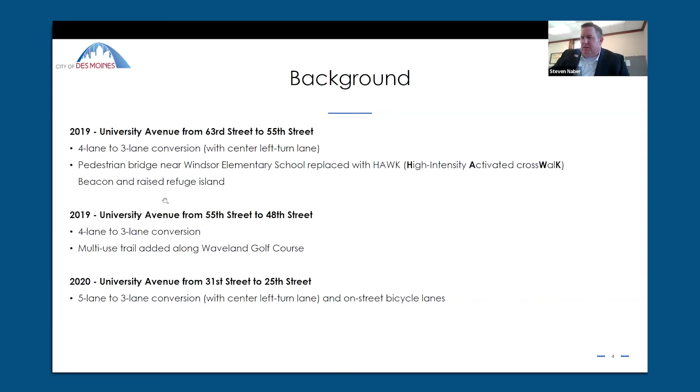Last year, as you may be familiar with, we resurfaced the roadway pavement between 25th and 39th, converting it into 3 lanes with buffered bike lanes. Essentially, this project is kind of extending that project. There was also some storm sewer work done as part of the sewer separation efforts, and then we had to do an emergency repair of a collapsed sanitary sewer.

Obviously, when we get into these projects, we find more infrastructure that needs work. So just to clarify, with the 25th to 39th project, there is still some work to be completed this year, including adding a mid-block crossing with a refuge island on University near 35th.

We still need to replace the traffic signals at University and 31st. And then there's a parallel parking lane section that needs to be constructed between 35th and 37th. So there is still some work to be done in that first phase of this section.

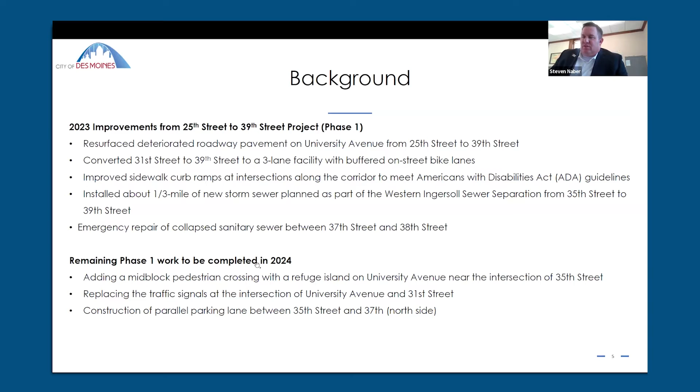When we look at these projects, in this case we had a resurfacing project and some sewer work to do. We always take a look at what our transportation master plan, Move DSM, says. So here are the highlights: it's part of our core bike network, and has been planned as part of that network for some time. It's a truck route, transit route, and primary emergency response route. The existing speed limit is 30 miles an hour, with about 12,500 vehicles a day.

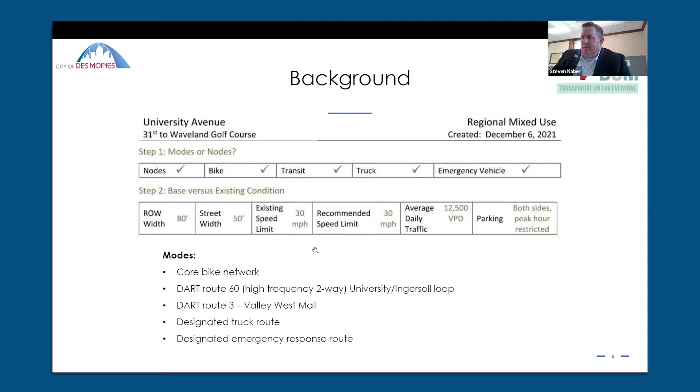So what's the point of the project? Well, the main goal is safety for everyone along the corridor. This goes right through the heart of our major neighborhoods and residential areas, so there's lots of pedestrian traffic. Going to road diets like this, reducing to 3 lanes, has been proven nationally to improve roadway safety. It's obviously easier for pedestrians to cross one lane of traffic in each direction than a 4-lane undivided roadway with 2 lanes in each direction.

And it's better from a vehicular standpoint too—there are fewer turning conflicts. The hope is that more reasonable drivers will help control the speeding traffic and reduce some of those speeds.

We did take speed information in the area of 45th and 46th Street, recording speeds over a 24-hour period. The 85th percentile speeds were between 37 and 39 miles an hour. That's what the majority of people are going—85% or below are traveling at that speed or below. So a lot of people are traveling at that speed, even though the speed limit is 30 miles an hour. We've got to look at ways to try and curb that down.

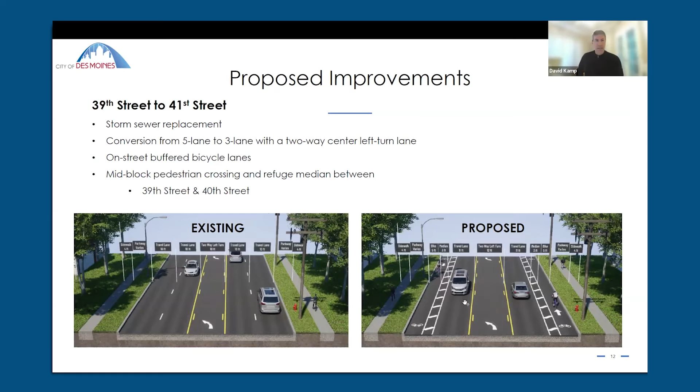And then there'll be a mid-block pedestrian refuge for pedestrian crossing at 39th and 40th.

So the next slide shows a little bit more detail of that storm sewer outlet. We're focusing on increasing the size of the storm sewer pipes here at the outlet.

We're also consolidating some of the pipes that were coming in along 39th Street to make it a little bit more efficient. And this includes

the storm sewer work in University, but this will not be to the extent that you saw in the previous phases. So it will still have some impacts, but not as significant as the previous phase.

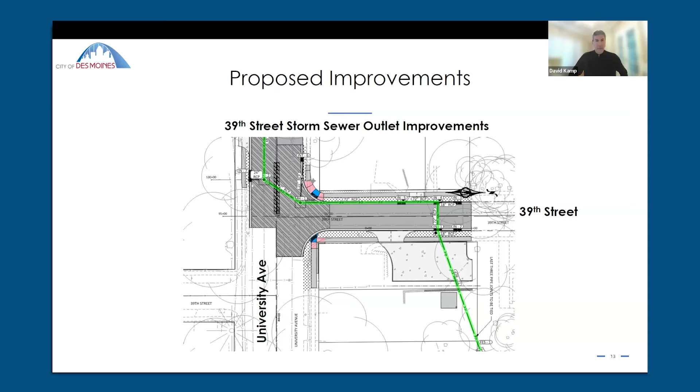As we talked about before, the 42nd Street signal replacements.

42nd to 47th Street is mainly just a mill and overlay, converting the 5-lane to a 3-lane with a 2-way left center turn lane,

providing those on-street buffered bike lanes with a mid-block pedestrian crossing refuge at 45th and 46th.

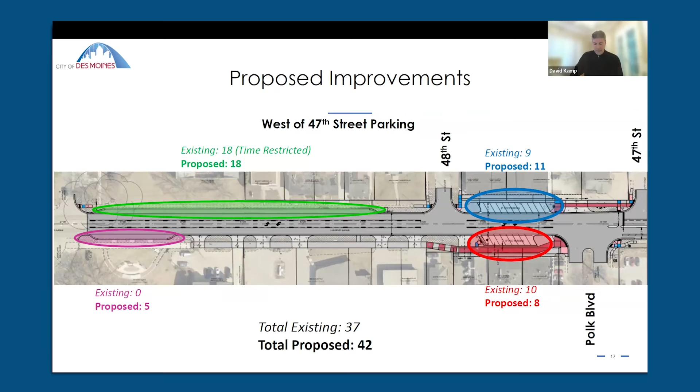So that gives you, for the area we were looking at, about 37 parking spots. We've added about 5 to get to about 42, but in front of the businesses, the total number did stay the same. Jump to the next slide.

I'm going to turn it over to Jacob Ahrens to talk through the construction schedule and some of the finer details of the staging with that. Can everybody hear me here? Yes, sir. My video is not working for some reason - I don't know the setting causing that, so I do apologize there.

Looking at the construction schedule and phasing, as Dave and Steve both mentioned, we are starting with 42nd Street, which was not in the original plan. The basis behind this is that it's going to be one of the first and primary detour routes given its current condition. There are some hold-up spot repairs we completed, coordinating with residents. The road closure will be roughly a 2 to 3 week window, currently estimated with the schedule from the contractor to be April to May. With that detour, it'll utilize Interstate 235 and 31st Street, with that being a designated truck route.

As we jump to the next phase, 2A and 2B, shown in the top right corner - that's 2A, where the biggest component of construction will start. This will be underway potentially at the same time as phase 1, since we're not causing impacts into the University corridor, just a closure of 39th to get the storm sewer started, shortening the construction period by doing 2 components at once. So they'll work 39th out to University. Once they jump into 2B, that's when the closure of University would occur due to the depths of the storm sewer, keeping in mind we want to make sure it's a safe area for pedestrians, vehicles, and so on. So 2A is March to early July, and 2B would be June to early August as the anticipated schedule from the contractor. That detour will utilize 42nd Street to I-235 and then back on 31st Street.

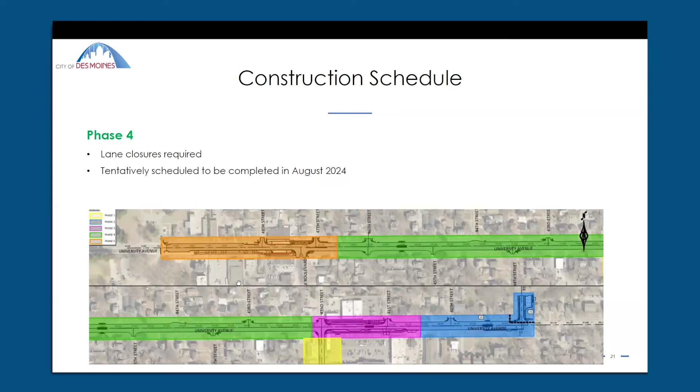Working on the north side, we'll then shift to the south side. Once both sides are completed, we'll put in the median at 47th Street, wrapping up that intersection for those turning movements.

As driveways and sidewalks are removed, the same process will take place to maintain access in and out of businesses. We'll work with the businesses to see what days are best for removing pavement in front of their buildings, and look at some sort of temporary measure if needed. Then as construction activities occur, it's just a matter of coordination.

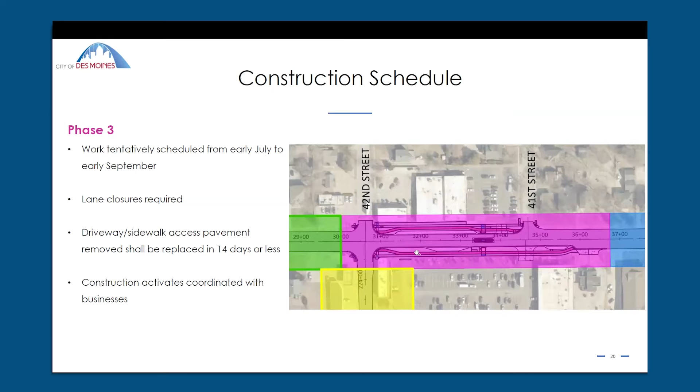Thank you. You know the question I'm going to ask. Are you going to accommodate a bike wanting to turn left from Polk onto University? Will there be a loop or some sort of detection so that we don't have to break the law to turn left? Appreciate that, Carol.

And yep, so the answer is yes. I'll give it a shot, and maybe Jen Dokovich or John Davis can make sure I'm speaking right. But my understanding is when the signals are placed, they'll be put in different types of loops. Quadrupole, I think I'm pronouncing it right, are the types of loops that will be put in to better detect bicyclists, because our understanding is that's the issue - you can't get a signal until a car comes. And so they are correcting the loops. John or Jen, did I get that right?

You did get that right. Yes, there will be detection for northbound vehicles turning both right and left from Polk Boulevard onto University, and for vehicles, including bicycles, turning westbound left onto Polk Boulevard. East and west through traffic on University returns to green on its own, so it doesn't have detection at all. You will always get the green if there's not a vehicle waiting on Polk Boulevard. So yes, and those loops are quadrupole loops, and they're designed to pick up bicycles, motorcycles, cars, trucks.

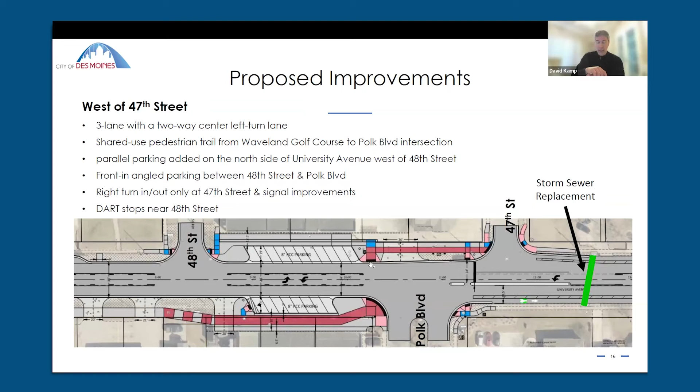Okay, and then will Kingman be closed again this summer like it is now? Kingman is closed right now for a sanitary sewer repair. We are working on a resurfacing plan for Kingman, and if it is closed this summer, it would be short-lived.

Okay, so like - short-lived, Dave, is like what? Would that be two days, roughly? You know, you'd mill it, you'd go in sections. You'd mill one day, you'd pave the next day. It's just the resurfacing of Kingman.

It's closed right now, and it's unfortunate because it's a parallel street to University, and it's a place to ride, a low stress place to ride, especially while University is under construction. So the timing of having them closed at the same time is really unfortunate.

So if there's a way to really make the Kingman work short, we should be done. The hope was to be done, I think it was June, because what's going on there is it's a sanitary sewer repair, but we have to relocate two water lines, one being 8-inch and one being 20-inch. That's why everybody got the notice about water being out as well. So it's not a simple fix, but that's a big deal to get that one done.

Waterworks didn't want us closing that 20-inch water main down in the summer, so we had to do it in the winter. So Dave, we're hurrying it. And you are correct, we're not going to be closing University right away. We're going to be working on 39th Street sewer north of University first. So the plan, Dave, is that the Kingman work would be done in June before the real heart of the University work starts in July. Is that the plan? That's the plan if everything goes according to plan.

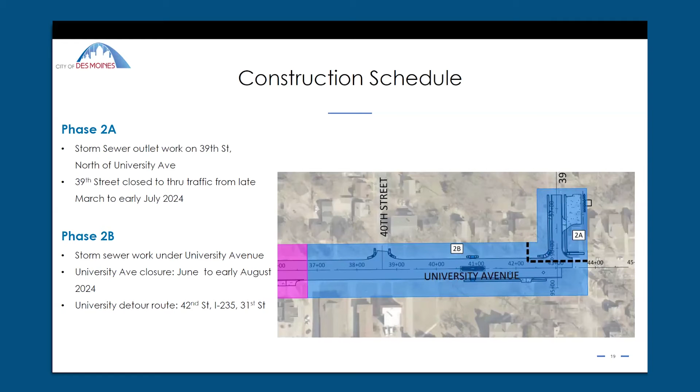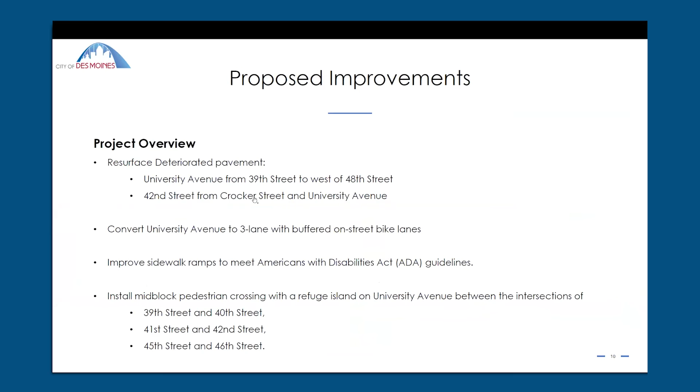I'm just going to talk a little bit about the phase that's finishing up now. It is really in a bad state. I last rode through it on Sunday, heading from the Varsity Theater towards Polk. It was nothing but barricades with no signage, and I almost got run over two times in that short distance by big old pickup trucks. One of them waved at me, not with a friendly wave, and screamed 'get on the sidewalk.' So please provide some signage about bikes can use full lane or something, because there's nowhere for us to ride. It's very unsafe, and there are so many barricades, it's very cluttered. Hopefully that piece will get done quickly.

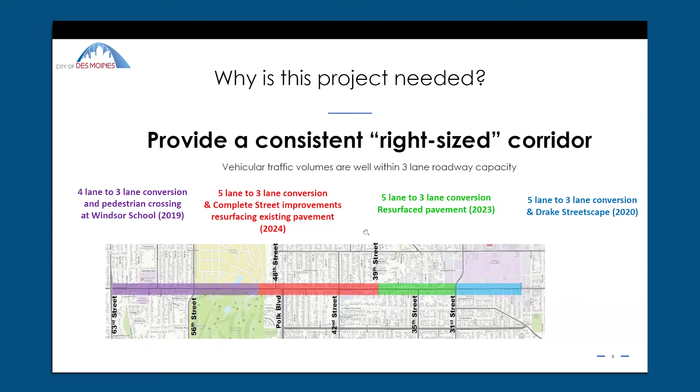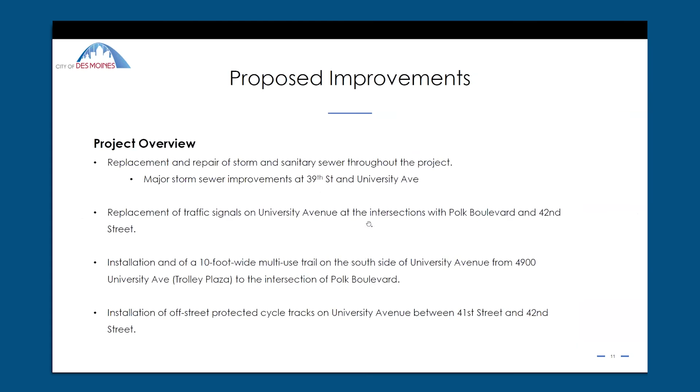This looks great, I'm all for the bike lanes and things. My question that I've sent to you guys is that we have 7 or 8 individual business buildings between 42nd and 44th Street. Right now we currently have on-street parking available. We all in this neighborhood know that it is not currently safe to actually use most of the time, so it doesn't get used often. My question is, why are we losing the on-street parking for a commercially mixed use, commercially zoned block here?

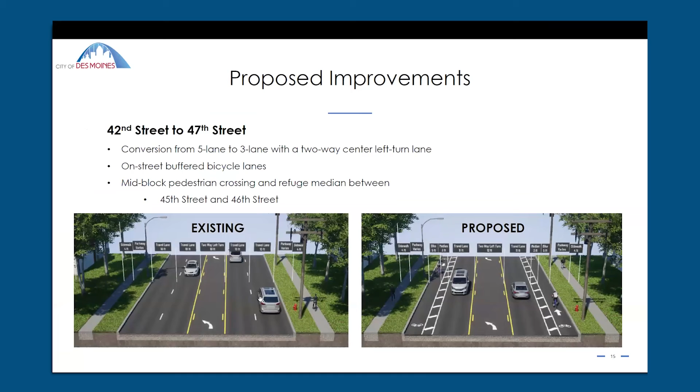And Laura, just to clarify, you're meaning 41st to 42nd, right? Well, between 42nd and 44th or 45th, we're all commercial businesses here, minus 3 homes in this block. And I recognize that parking does not get used often because frankly, people are just flying around each other, turning left off of 42nd, going around Little Caesars there. So nobody feels super safe parking there. But it is available, and I'm a little bit concerned that all of these commercial businesses are losing the possibility of on-street parking, when I think this could be a great opportunity to make that more functional for these businesses in this block. And you're saying all the way to 44th, or maybe just the first block to 43rd? That first block, there's 7 or 8 of us commercial buildings in this first block right here.

Okay, I appreciate that comment. I think, is it now, because currently you can only park there some times of the day, but not during the peak hours? Is that correct? Yeah, not 4 to 6 on our north side and not whatever the morning shift is on the south side. And it's not only the commercial, as that goes further there's several multifamily units and things like that as well, and I think they use that further down the block a little bit more on the street.

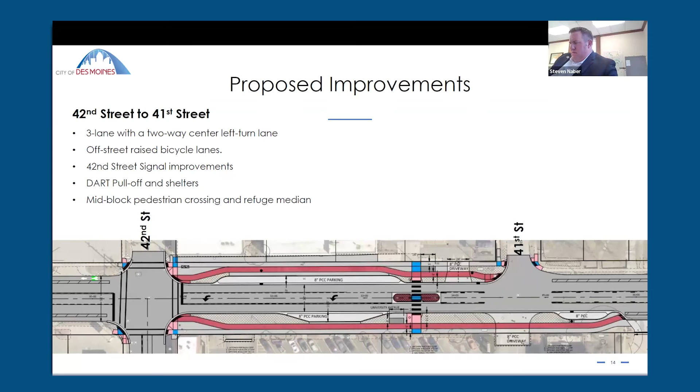Sorry, Terry, I was able to hear you, but I could not hear Kate. Can you hear her now? Sorry, I hear you, but... It's paused for some reason. Hello, can you hear us? I can hear you, Terry. Okay, Kate, go ahead. Terry, I apologize, we can hear you very clear, but we can't hear Kate at all. I don't know, maybe we could, Dave, maybe we could put up Chris's information and connect Kate with Chris directly. Let me see, what's up here?

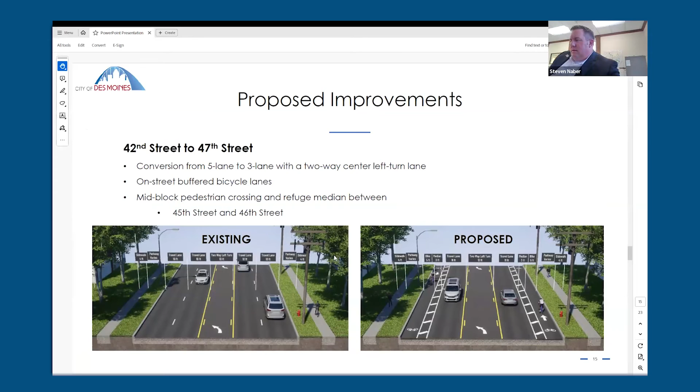All right, let's switch. Is the web page showing up? So again, if you go to the city website, under departments, engineering, then projects and studies, you'll see a whole bunch of different projects. Type in University, click on the more info, and here's the background. This page has been up a couple of years, and it has our project manager, Chris Kuhl, and his information: 515-283-4073, with his email ckuhl@dmgov.org.

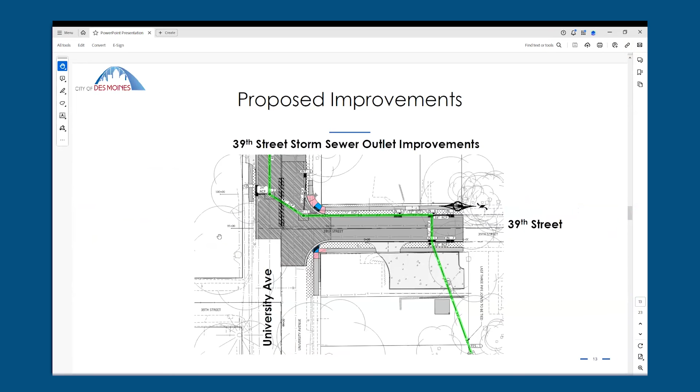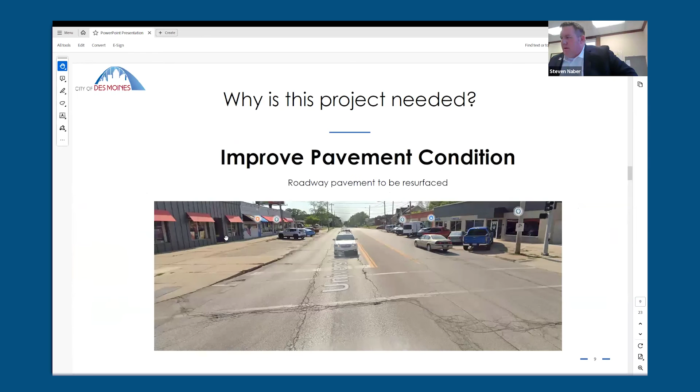If you go back to the one node there, starting on the west end where we showed the parking, you can see them a little clearer. For the most part, everything outside of the nodes, off the top of my head, stays within general vicinity of where they are today. On this sheet here, you can see just west of 48th on the north side, just outside that green oval, there's one right there.

So there is a bus pad projected in the future that DART is looking to coordinate. For the time being with this project, we have provided that access point to the curb for pickup. And then on the south side, just across the street, we've moved it slightly further west so that when buses do stop, they're not conflicting with turning movements for people coming in and out of 48th Street and the traffic around the node between 48th and Polk.

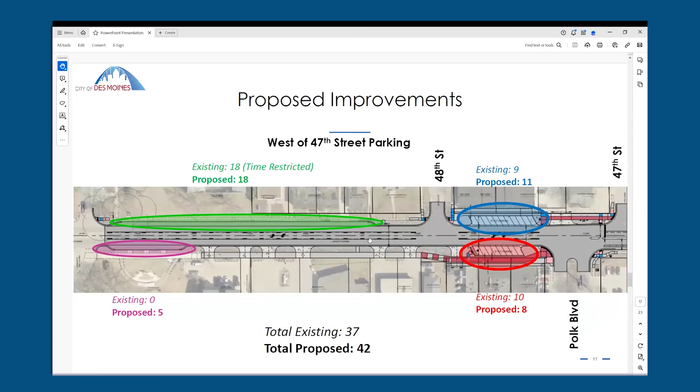And then the other specific ones would be down between 42nd and 41st. Those will be designated areas built as shelter pads, and then DART will install the shelters after the project. So in the darker gray there on both sides, the south and the north, the pads will be installed for the future DART shelter.

And then, like you said, the other ones are pretty much where they are today, and I think we've tried to get ped crossings nearby. Some of those are, right? So.

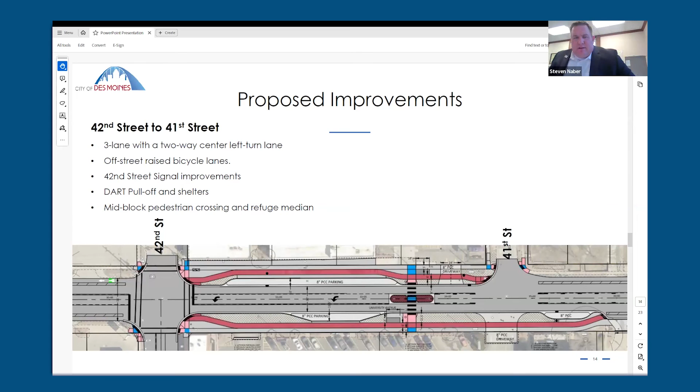Okay, and then let's see here. Chris Williams asked what traffic control will be in place on 42nd while it's being reconstructed during the school year. So let's go to that staging there. And again, one clarification, Chris—this is going to be resurfacing, so it's not reconstruction where we're digging all the way down to the dirt. So the contractor would be milling off pavement and paving new back. But that is a good question.

What is this? I don't know, Jacob or Dave, do you have any comments on what this will look like? It is during the school year, April, May, with the school just to the south there.

Yeah, let's see here. I'm just looking through the provisions here.

One thing we'll probably talk with the schools about, and we'll have to coordinate with them. I can't answer that off the top of my head. We may have to coordinate with the contractor to do some operations where they can flag and do lane closures during the week, but do we need to consider talking to the contractor about weekend surface paving to try and accommodate that? Or maybe that's something we can just discuss with the school, since they have a lot of days off too. So that's a good point, Chris. We're gonna have to work with the contractor and talk to the school district about when we think major activities such as paving would be best to do.

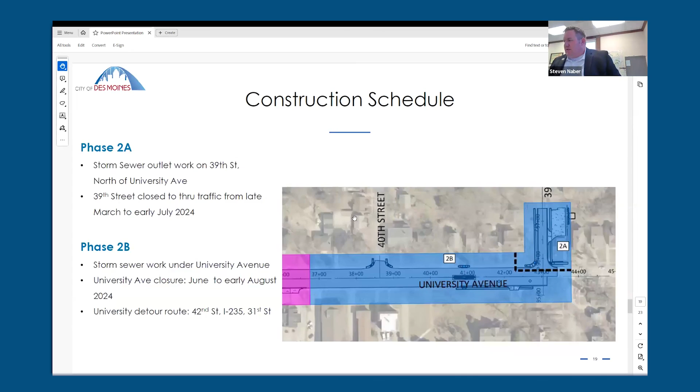Kate asks: my question is regarding our business receiving deliveries for our trucks. Will they be able to reach Heartland Animal Hospital through 41st? Good question. During construction, their trucks obviously have to get into this parking lot. I don't know, is that just a coordination effort for when there'll be a short time frame where there's actually paving at 41st and it's closed? Remember, they have two accesses into that parking lot right now. But there would be a time for the new access when we're rebuilding the driveway access, so we wouldn't do them at the same time - that's the idea, staging between those. And the intersection of 41st isn't a full reconstruct, so access would still be provided outside of that window when milling or paving takes place.

Okay, thank you. Let's keep going through it here.

Kate asks: does the crosswalk on University between 41st and 42nd have lights present to help crossing? Is this one of the ones where we're putting the conduits in, but there's not a signal? That's correct, there would not be a signal. With this scenario, you'd actually only have to cross one lane at a time. But there would not be a signal or flashing lights there - there would be warning signage, but not a signal or flashing lights.

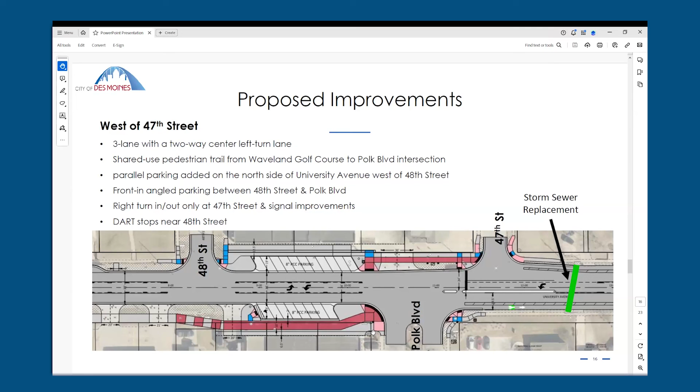On the diagram at Polk Boulevard, where they can cross from the north side to the south, how is that controlled? Is it bikes cross at their own risk, or is there a light where traffic would have to stop? Everyone, bikes and pedestrians, would use this as a crossing, so it'd be the traffic signal - you'd have to press the push button, and it'd be like a walk, don't walk signage like other corners and crosses. Okay, thank you.

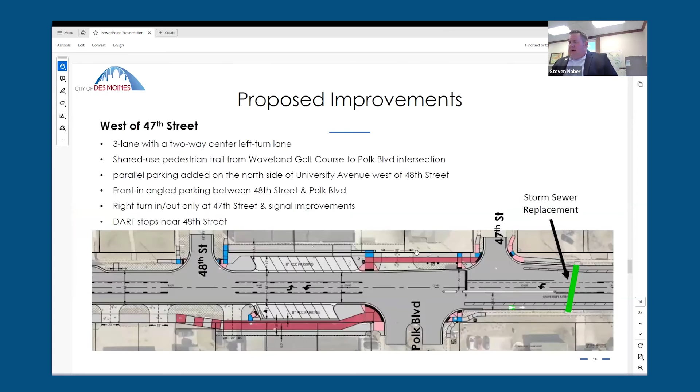Monica has a comment: I'm one of the homeowners at University and 42nd next to Kum & Go. How long will our driveway be blocked, and where will we be detoured? Where will we park our vehicles? Good question - let me see if I can get to a good staging section there. It's probably in the green section.

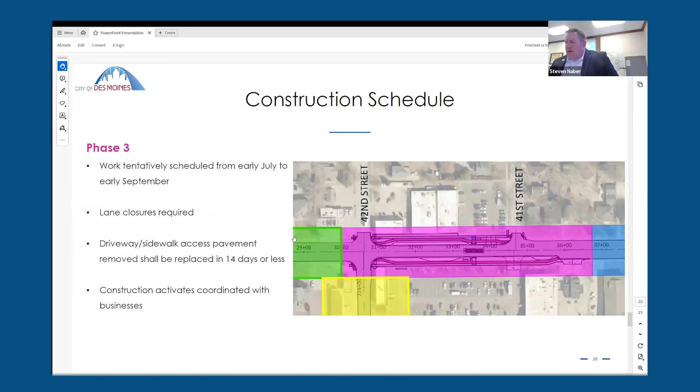Can you talk about the construction in the green section where there's homes, and how long people might be out of their driveways? That'll get talked through with the contractor. I'd see it very similar to the phases we just saw east of 39th, where they mill outside of peak hours and put back pavement as quickly as possible, then come back through with the overlay operation, also outside peak hours as best as possible. That allows residents to exit their driveways in the morning, and hopefully everything is put back to provide access when they return in the evening.

Similar looking down 42nd Street as well. That would be coordinated, setting out a flyer to everybody on when impacts are anticipated. If we break it down into sections with the contractor, that'll be notified out to everybody at that time.

That's a good one, you mentioned the flyers. There'll be letters during certain phases to people if there's closures or major items of work happening.

For this project and its impacts, we're going to have an on-site construction inspector, a project liaison. Jacob, do we know who that person is? Yep, the primary contact for Bolton and Menk out there doing day-to-day operations will be Rob Silliman. I can pass that contact along, let me get it pulled up and I'll put it in the chat as well.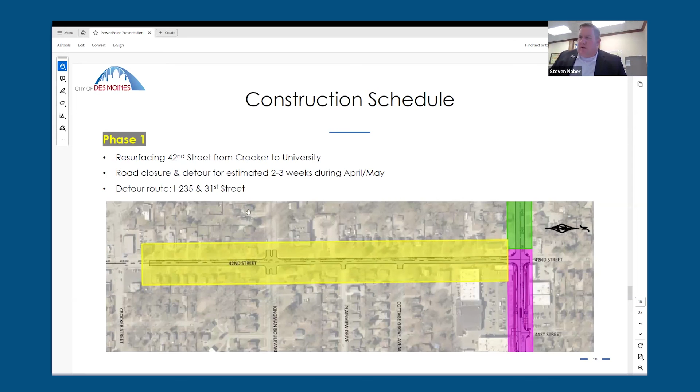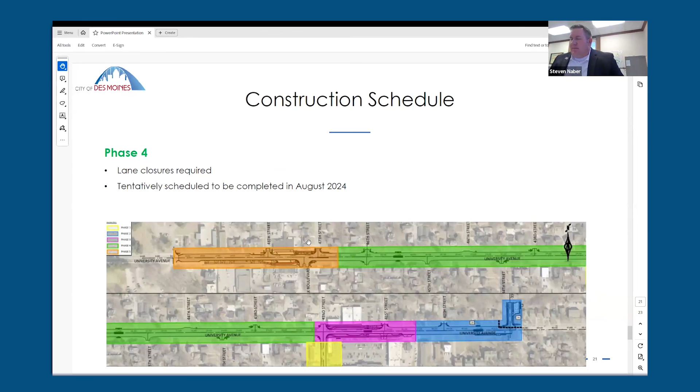I want to thank everyone for their time and appreciate everyone's patience. We know this construction is impactful. We're hoping for everyone's sake it moves as quickly as possible, but we know it takes time when it gets to the sewer work and some of these improvements. We hope everyone will be really appreciative when it's done. I think the new paving and cleaning up some of the areas is really going to improve this area, so I'm excited about it. Again, I appreciate everyone's patience.

Please, we've given everyone the contact information, don't hesitate to reach out. I know we've talked about some specific businesses we need to have meetings with as construction gets closer, and I appreciate that as well.